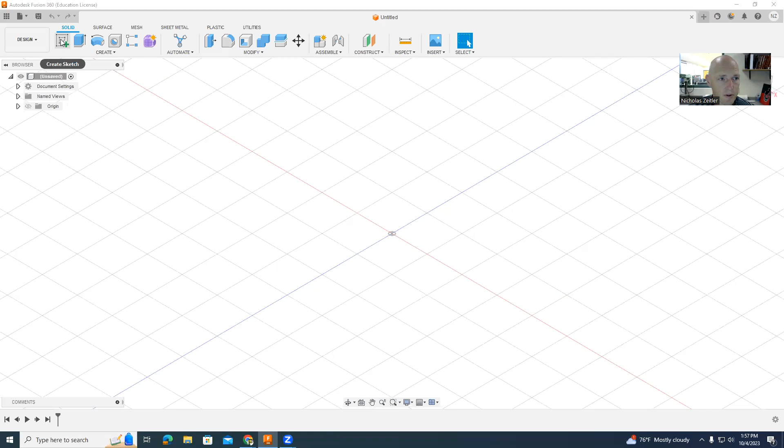In this tutorial, we're going to take a look at how to create the parts from the multi-view drawings worksheet in IED and how to create the dimension drawings from them. So I'm going to use a ruler to measure the measurements from the views on the worksheet that we did in class. So I'm going to start by creating a sketch.

And for this example, I'm going to start with the front view because there's a lot of detail in the front view. I think it's a good place to start. So I'm going to start with the front view, and then there's just going to be a section that I cut away from it in the second step. So I'm going to start by drawing this out.

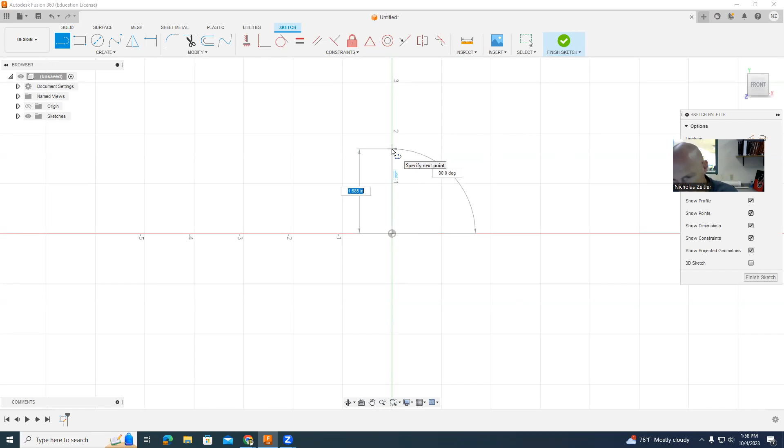I'm going to start right here at the origin, and I'm going to draw my way up. As I measure my worksheet, it looks like I'm going up 3 inches. And the width of my part, it's like I'm bringing it over 1 3/4.

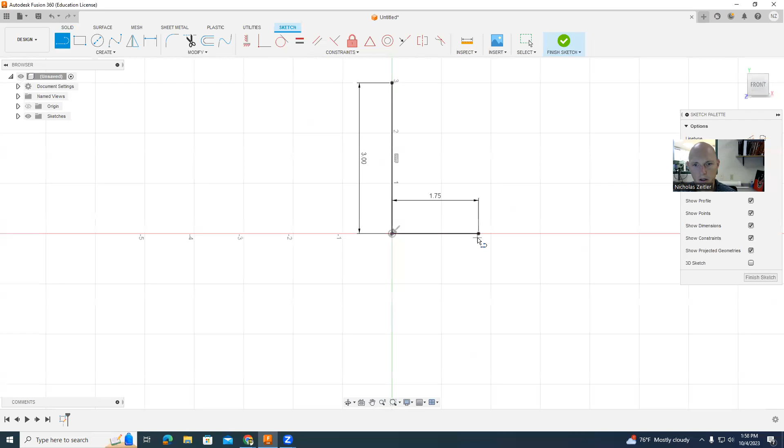Then I'm bringing it up from here. There's a vertical line, and then from that vertical line, I'm going to make it to the angle. So here it looks like I'm at 1 1/4. I also do have a horizontal line, a short horizontal line up at the top. So that looks like it's going to be a 1/4 inch.

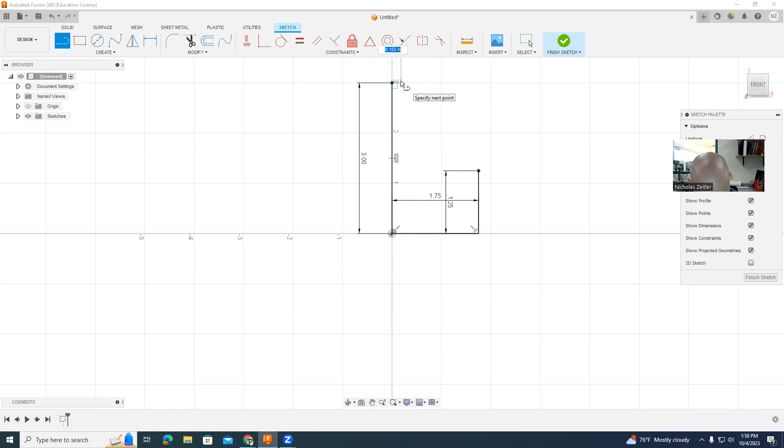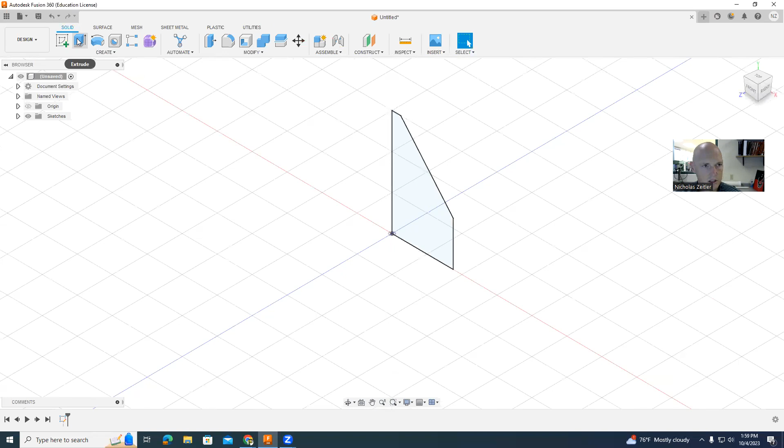And then I can connect this to close up that shape. From here, I'll finish the sketch, extrude. The thickness of this part looks like it's 1.75. All right, and you'll notice that I now just have a part to cut away in this corner of the object. I think the easiest way to do this is to rotate it, and I'm going to draw a rectangle on the bottom to cut out.

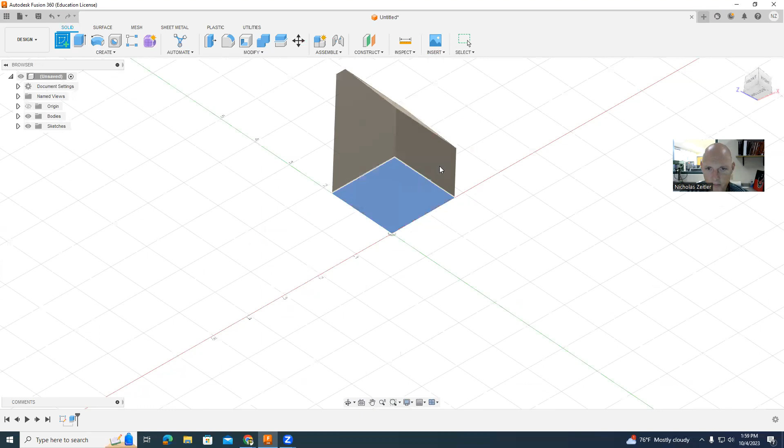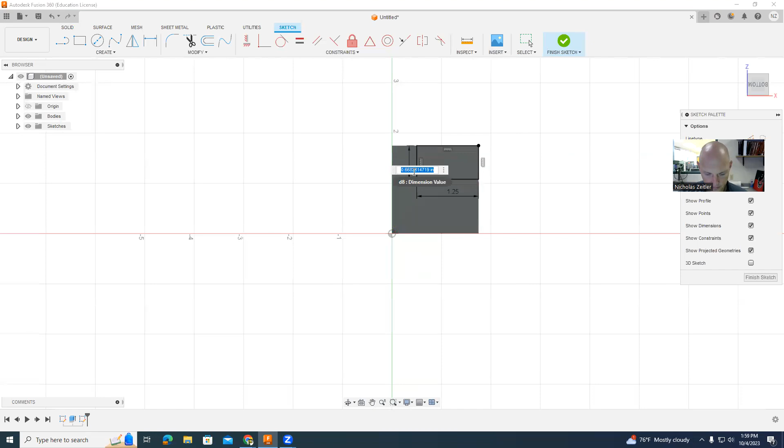So I'm going to create a sketch on the bottom of this part, and then this is where I need to cut out. So I'm going to make a rectangle here, and I'm going to dimension this rectangle. All right, so if I'm looking at the drawing, it looks like it comes in this direction, 1.25. And in this direction, it looks like it's 7/8. So I'm just going to type 7/8.

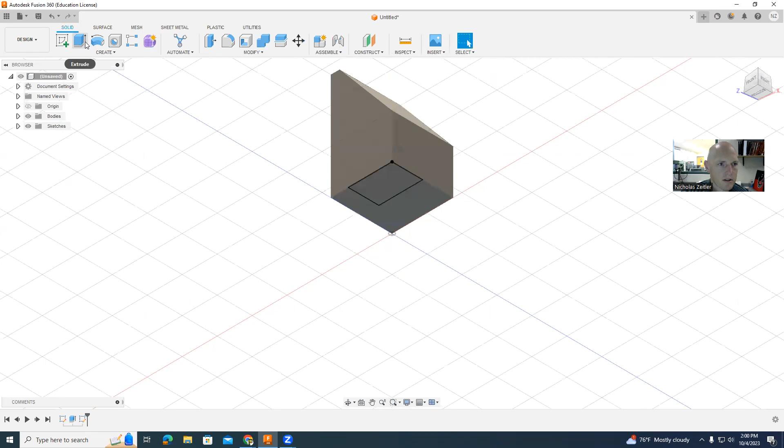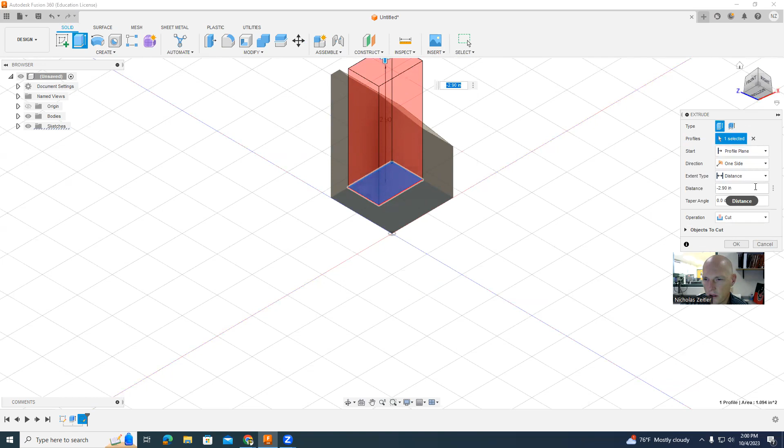All right, from here, I need to cut this out. So I'm going to click on extrude. And I want to extrude this. And I'm going to change it to cut. And I want to go all the way through the part. And I could change the distance to all, and then it just goes through everything. All right, so once I have that, I can hit OK. And now I've completed the part.

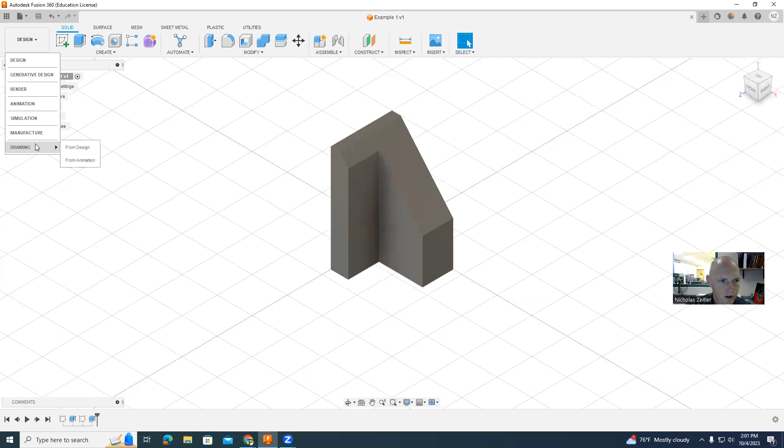The next thing that I'm going to do is create a drawing from this part. So I'll go ahead and save. And now that I have it saved, I'm going to go from design to drawing from design. And then here, I'm going to change the sheet size to an A size piece of paper. That's a normal size piece of paper. I'm going to hit OK. And then it's going to generate a piece of paper with a title block.

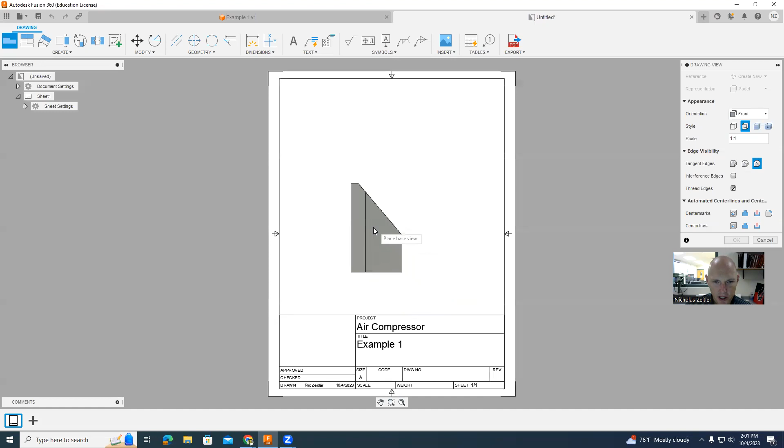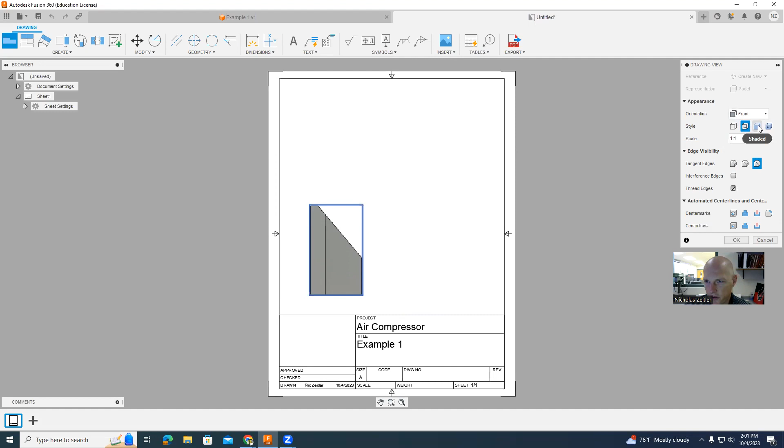And I'm going to create a multi-view drawing. And it should look the same as what your worksheet looks like. So I'm going to select where my front view is going to go. You'll notice over on the right side of the screen, I can select the orientation, the scale, what it looks like with different styles. I'm going to leave it as visible with hidden edges. I'm going to hit OK there.

There's my front view, and now I'm going to project some views from there. So my top view is here, and my side view is here. And if I did everything correctly, it should match what I did on the worksheet. From here, then I want to add some dimensions to my drawing. So to add those dimensions, I'm going to click on dimension.

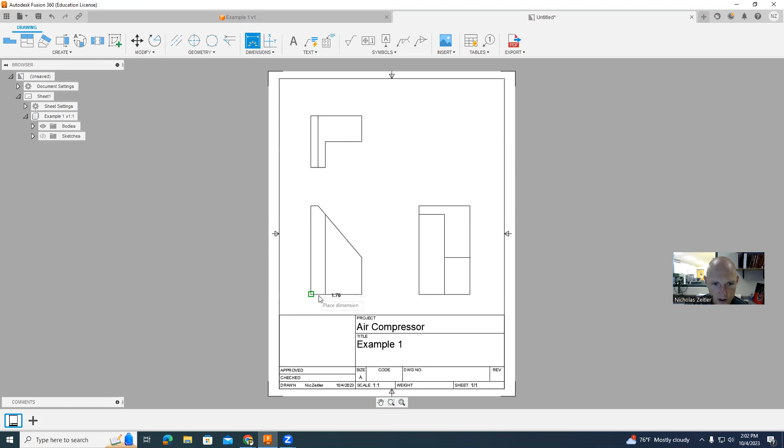And what you're going to add here is everything you needed to know to make this drawing in the first place. So when you took your ruler to the worksheet, what did you have to measure? That is what we want to identify here. So some of the obvious, we need the width, the height, and the thickness of the part. We also needed to know how far to cut this section out, so we can leave measurements, so that way we know how to make that.

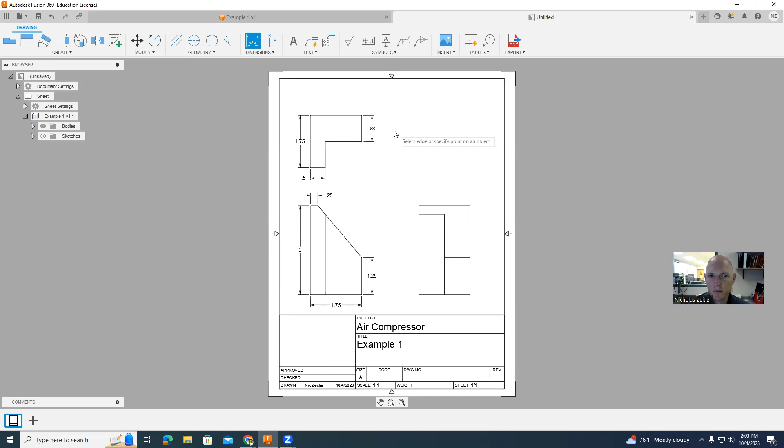We also needed to know how big this section was up here and this section over here. And I think that covers everything. All right, so once you have that completed, you'll be able to submit this drawing for your assignment. So I'm going to hit save again to make sure it gets saved.

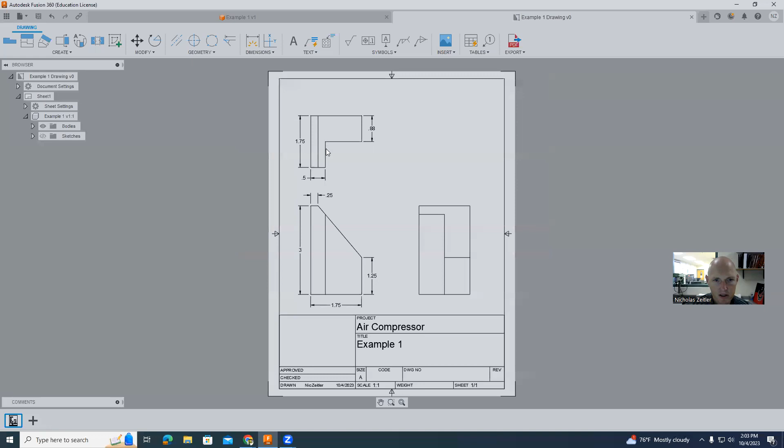You'll notice this takes the name of my model and adds the word drawing to the end of it. And this is what you're going to share. So go to share, link, and share this to Canvas. So you'll be doing this for both parts. I'll have another video then for the second part on this worksheet.